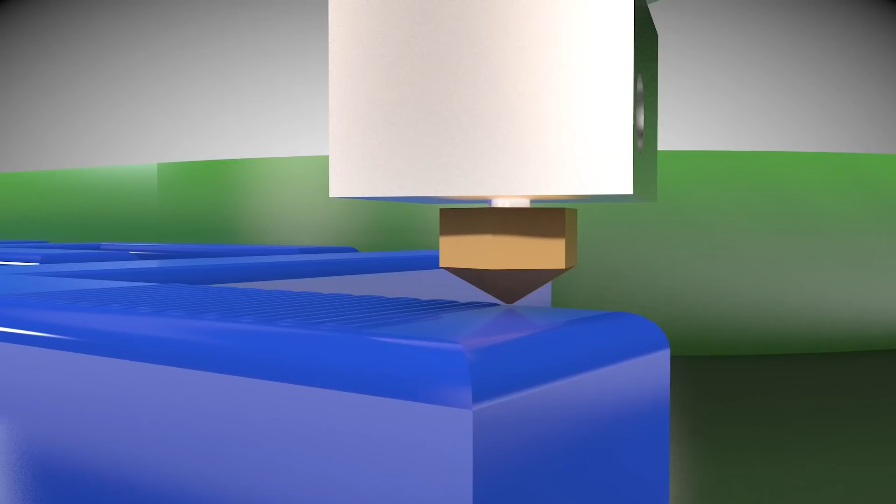Like I was saying in the introduction, during the 365 project in December, we printed out this really cool Droop Loop Christmas tree. If you're unfamiliar with this process, basically it takes a 3D printing failure to create this really cool fuzzy tree look. Normally in 3D printing, you want your plastic to meet another part of the model and continue on. In this instance, the little droop loops come out, stop, and come back, and do not connect to anything, and then they cool off and sag down, hence creating this really cool droop loop look.

This is a really cool model by Thingiverse user BQ3D, and I'll put that link down in the description. This year I wanted to do something different. I'm a little bit more confident in my settings in Simplify 3D, and of course my gMax 1.5 XT Plus loves to print big things, so I thought it was time to gMax size it. So for this year we have the gMax size Super Duper Droop Loop Christmas Tree.

This turned out awesome, and I printed out all the accessories that come with this model. Again, that link will be down in the description. It took a little time in Simplify 3D to get this to work properly, because when you scale something up like this with single loops coming out, you're going to get multiple layers of loops for the rest of the tree. I had to figure out how to master that to still create the look and not have this big bristly hard tree just sticking out everywhere.

For the print, we used AMZ 3D Filament. I used 3 different colors, obviously: some of their green for the base of the tree, some of their translucent yellow for the star on top, and some of their translucent blue to create all the ornaments. These were perfect for our tree. So let's head over to Simplify 3D, and I'll show you how I did the setup to print the tree.

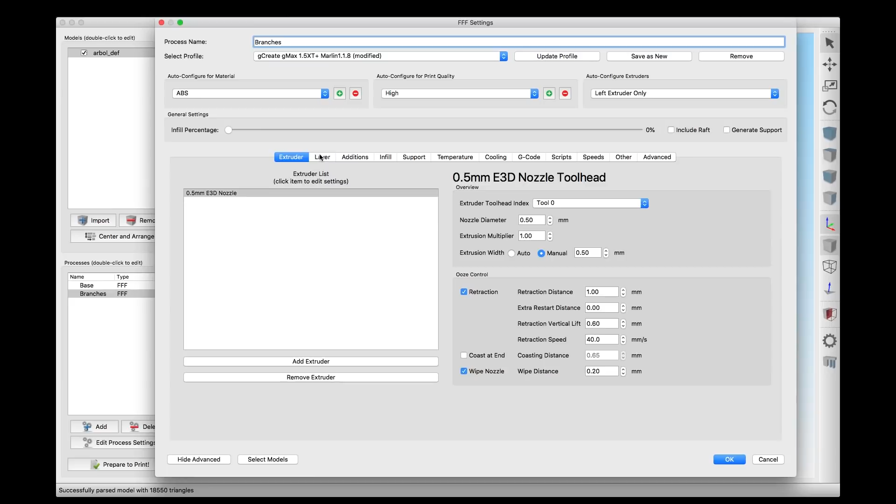For the branches setup, we have completely different settings for this, and this is very important because we really want to make sure that we only get one extrusion per layer. This took a little bit of figuring out to get it to work this way. I increased my primary layer height to 0.36, putting down the most amount of plastic I feel safe extruding out of my 0.5 millimeter nozzle on my gMax 1.5 XT Plus. I turned off the top and bottom solid layers and went down to one perimeter.

We've changed our variables here because we don't want to make any adjustments on that first layer. After the process change, it's 100% and optimize start points. We've turned off our skirt brim. We have 0% infill because we don't want to fill in these branches - we want them to be loops, no support material. And again, here are my temperature settings.

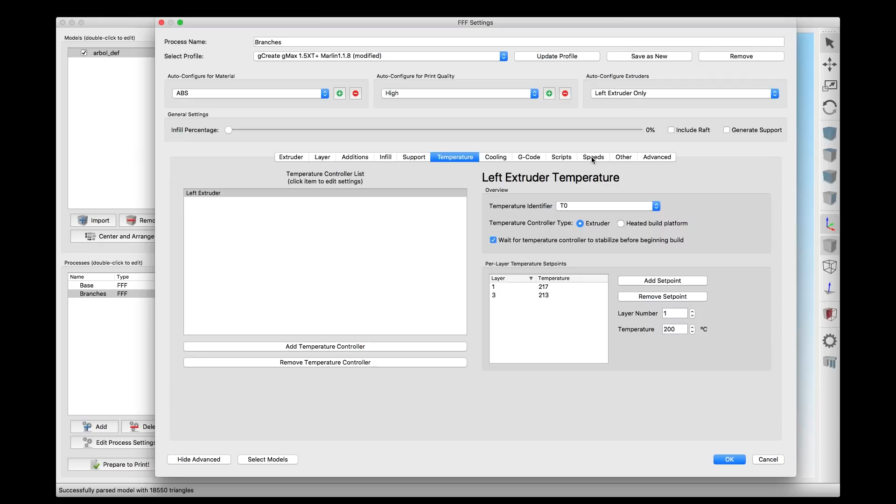If we go over to cooling, this is where I should have made an adjustment, but I didn't next time. Under speeds, we're going down to 40 millimeters per second with the same variables. Under the advanced setting, we are allowing single extrusion fill because I want to make sure that we override any kind of infill that might print, even though we have this set for 0. Sometimes Simplify 3D will add in support areas around infill, so I have this set up - this was the way it worked the best for me.

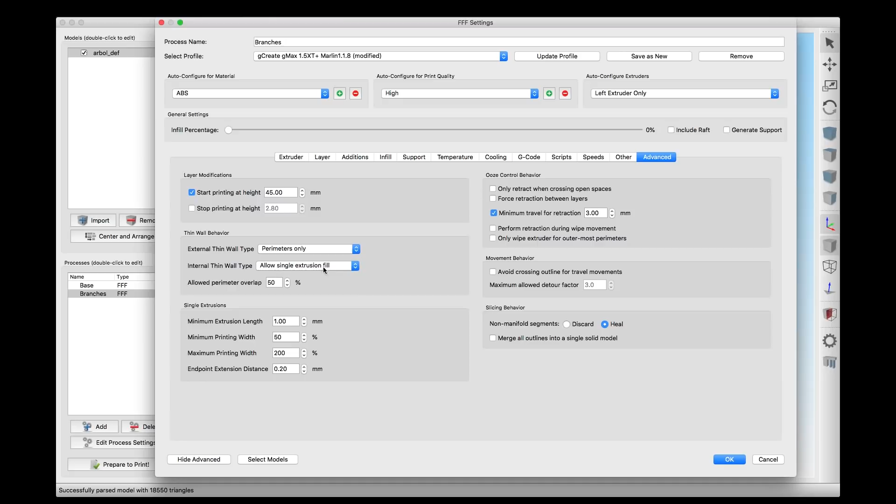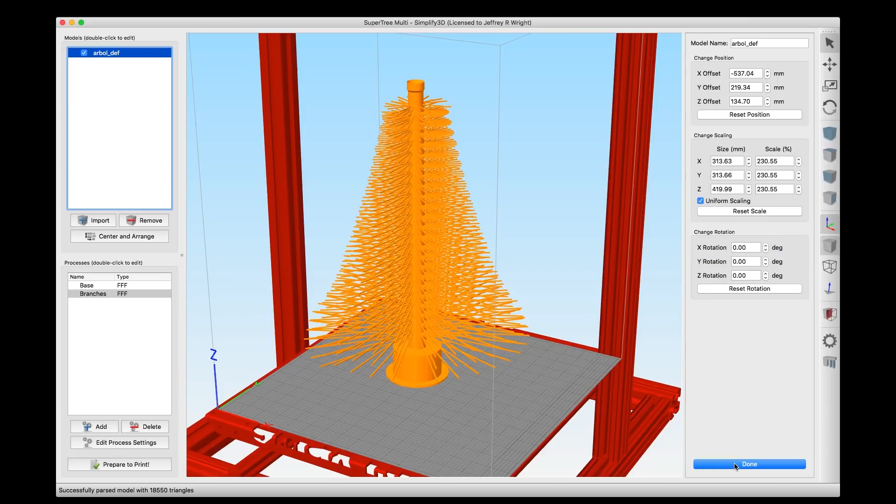So let's go ahead and hit OK, and we'll hit Prepare to Print. Before I do that, let me double click on the model and show you the scale. We're at 230.55%, 419.99, which is this 420 millimeters - the safest distance I go on my gMax 1.5 XT Plus, because I do have a filament runout sensor at the top, and I also don't want the print head to run into the filament roll when it gets really high. So 420 millimeters is my max build volume for my gMax.

So if I hit Prepare to Print, we do Select All, and we hit OK, this will process through and do our slice. Now I'll show you the differences between slicing it with regular settings and the settings that I figured out, but I want to show you this first.

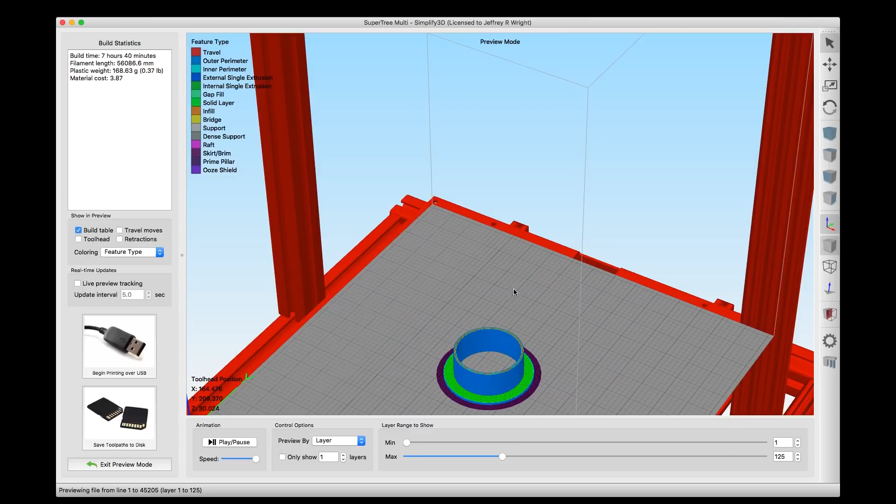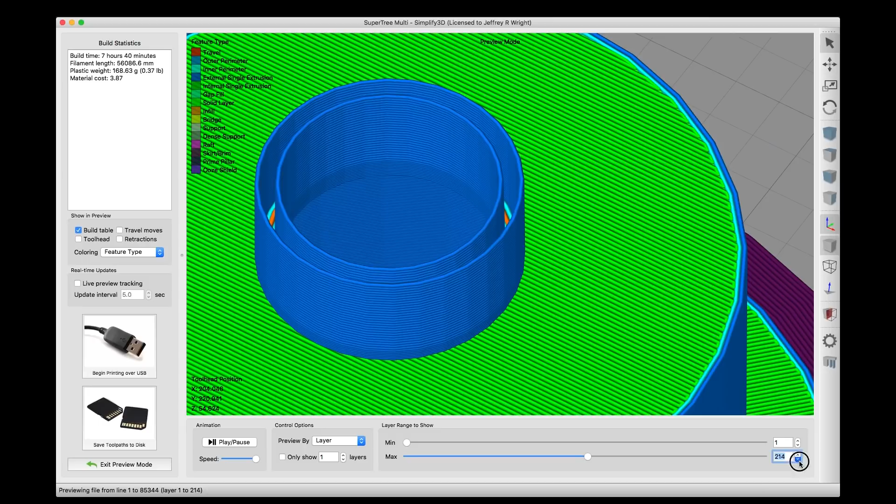So if we dial back down here and we zoom in, you can see there's the infill printing for our first process. When it gets up to the top, it starts printing out the shaft. As you can see, it's going to print out single layers. Now it's going to show you that there's multiple layers, but what's happening is these are on a per layer basis. So if I go down to the very first layer, you can see that we've achieved the process - it actually removes itself from the center or the outside perimeter and creates our loop and comes back. So this will give us a perfect join.

And if we go up to the next layer, this is already drooped down. That first layer that printed is already drooped down, and we're starting to do our second layer on top of that. This will droop down in a different direction because the laws of chaos.

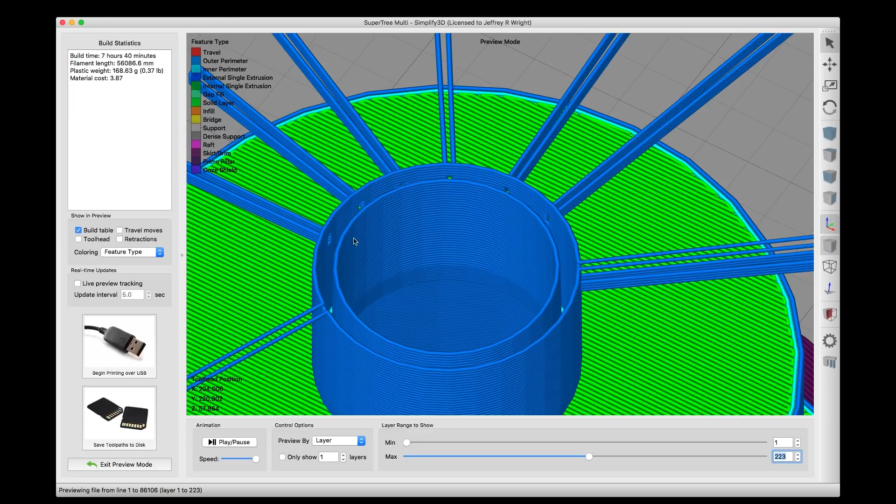If we go through here, you can see that it skips a few layers, and then it starts printing again. Now this will give it plenty of time to cool off and droop down, plus printing out this center perimeter will also give it a little bit of cool down time.

Now, if you look, you can see, if I go to the top view here, you can see that this is probably as far as you want to go, especially on my gMax 1.5 XT Plus with these long branches.

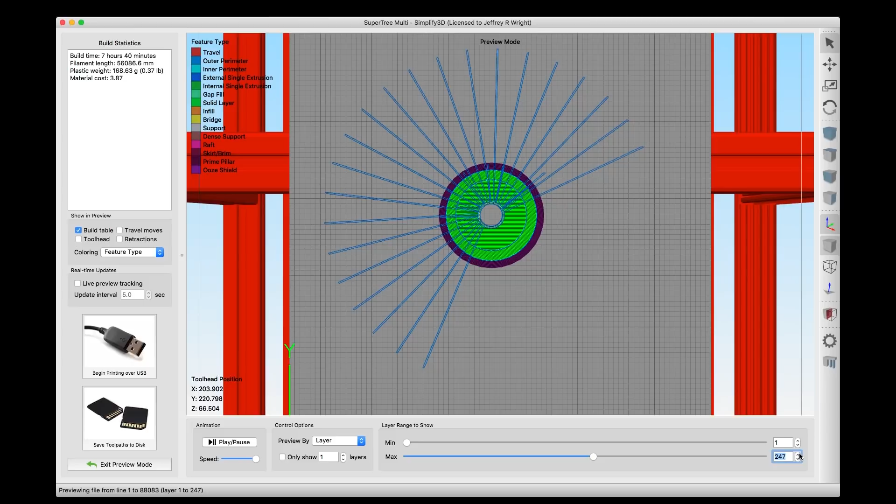So back over here in Simplify 3D, let's exit out of here, and I'm going to save this just to make sure. And let me show you what a standard looks like.

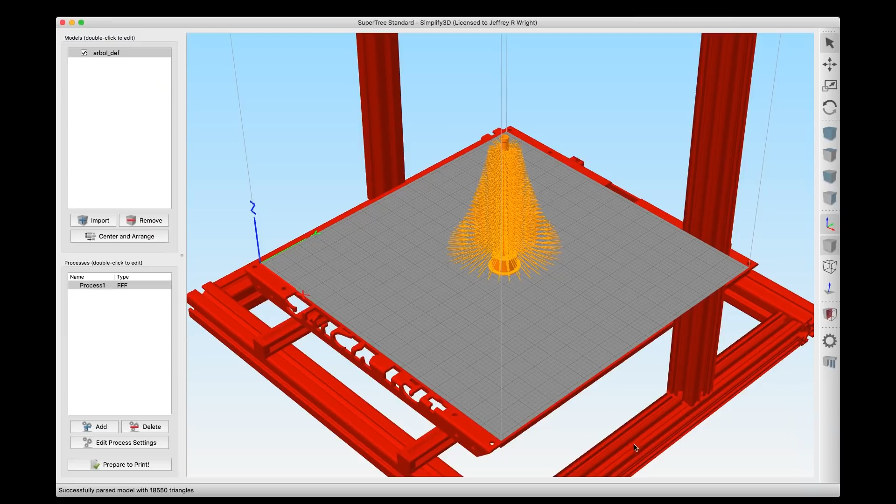So here's the tree at 100% with a standard process setup. This is my standard printing setting for my gMax setting, and as you can see, we have a 0.36 millimeter layer height. If I slice this and I show you, we're getting single branches coming out.

So when you scale it, you're automatically going to increase the size of these single branches coming out, and you're increasing the width of them coming out. So that's why I addressed it with a separate setting.

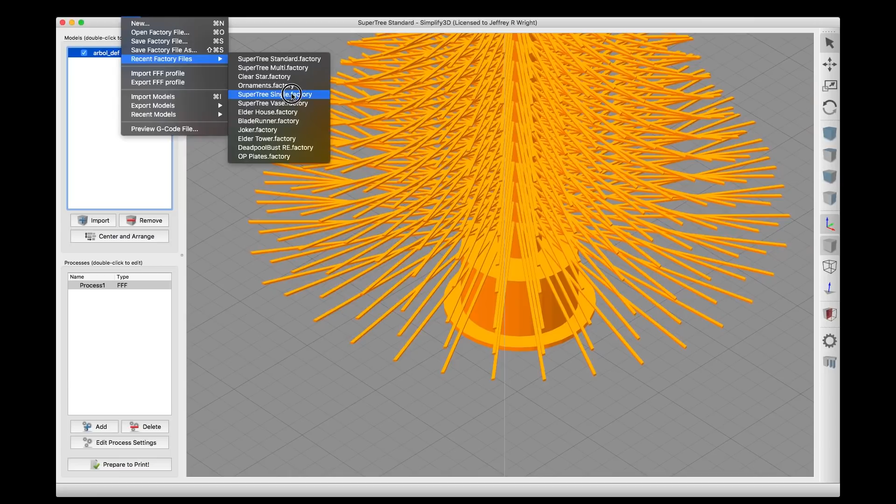Now I also have a model here in the Super Tree Single. Okay, so this model that I sliced was to show you if I didn't do any of those settings. So let's hit Prepare to Print.

And let's dial it down. Already you can see, if you go by the color, you have your gap fill and you have your inner perimeters, and you're getting a lot of that. Now this would create probably a stiff bristle tree instead of a Droop Loop tree.

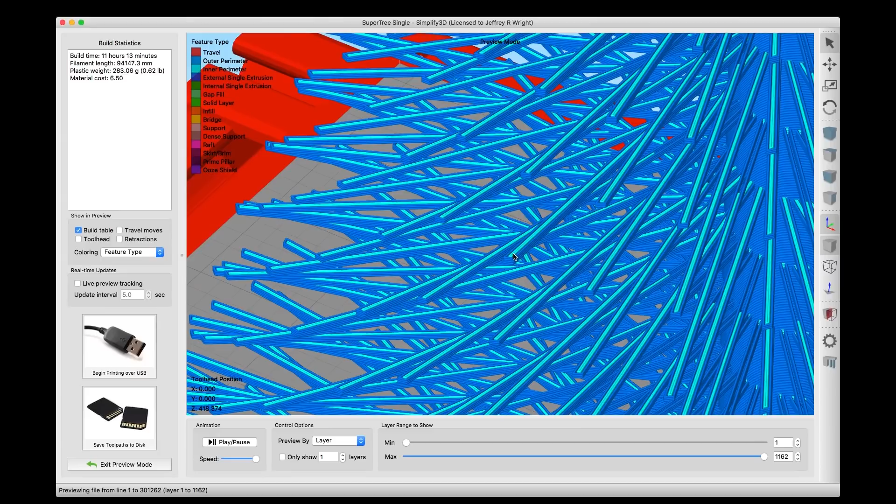So I knew I had to make some adjustments to my settings. So if we exit out of here and we go back into our old settings, and here's the settings I did for the star, and of course I did scale this up to the same amount, 230.55%. And as you can see, there is some built-in support material.

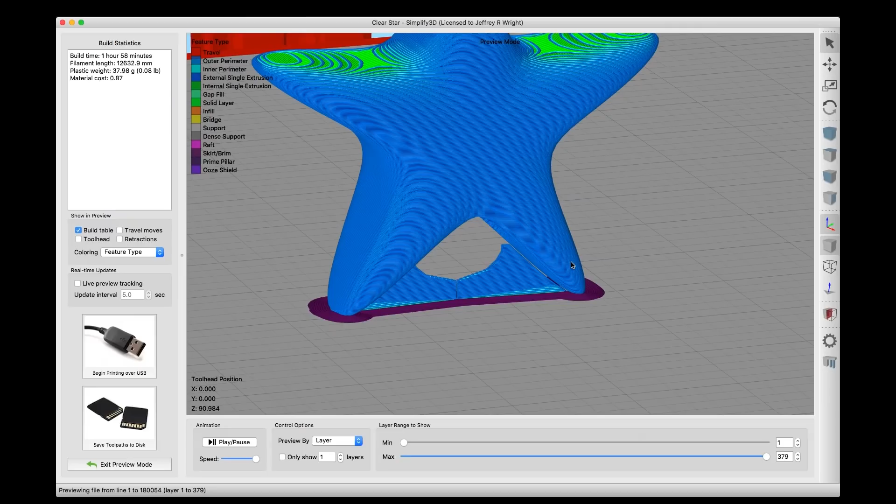And if I hit prepare to print, you can see I put down a brim just to make sure. And of course, I did lower this into the print bed just a little bit because I noticed that the star tips weren't quite touching.

So if we zoom out of here, let's go over and look at the ornament setup. And here's how I have the ornament. Now they come in one tray.

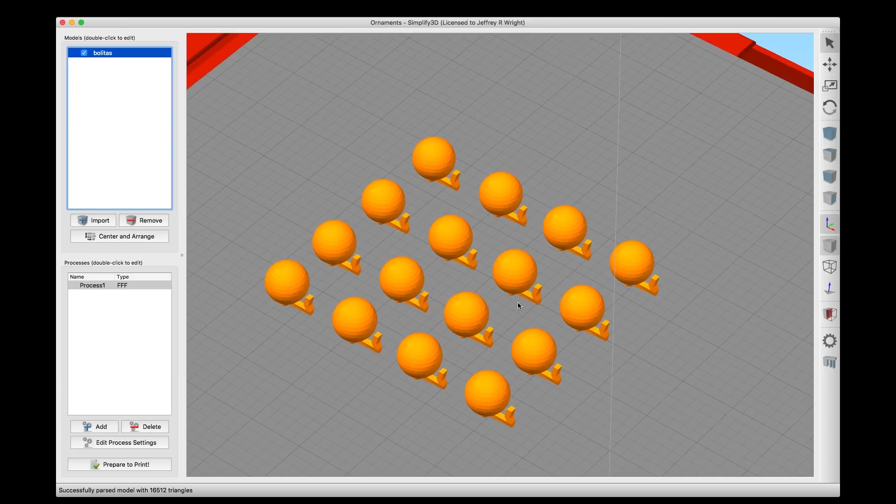If you have a multiple or multicolor or multi-extruder machine, you could probably print these out in 2 different colors, but you'd really have a big purge block.

But for this print, I just did some basic settings. Again, 20% infill. For this, we did a 0.16 millimeter layer height because they are spheres, so I want them to be as round as possible, so the smaller the layer height, the better.

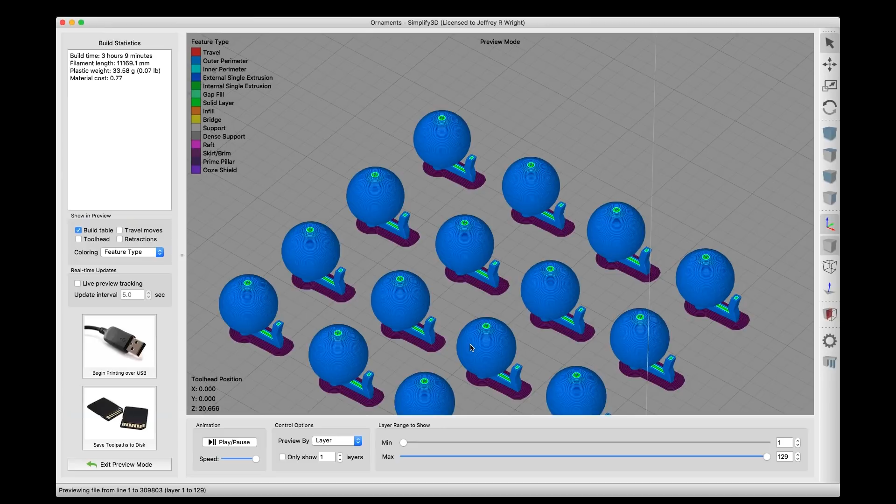And as you can see during the slice, there's a brim around each one of these just to make sure they all stay attached to the print bed. And I'll dial it through, and you can see you get a more perfect sphere with the lower layer height. So everything printed out really, really great, and I'm really happy with the results of all the prints.

So let's head back over to the workbench, and we'll talk a little bit about our gMax sized Droop Loop Christmas tree. So now that we have all of our files set up in Simplify 3D, it was time to load the gMax up with some of the filament that we were going to use. And of course, we were going to start with the green so we could print out our tree.

Now, if you follow me on social media, I was posting pictures of the progress of the printing, which is really cool to see because literally it's almost scary to watch this print because it literally brings the filament out almost the full distance of the build plate and then stops and comes back again, creating our Droop Loop.

Now, I probably could have, when I scaled this up, lowered the base down into the print bed a little bit and added a really thick brim or skirt around the edge there to hold it down.

If I had lowered the loops a little closer to the print bed, it would have created a bushier tree, but I was happy with the way the print was going, so I let it finish. This was a longer print since we scaled it up to 419.99 millimeters. I actually plugged in 420 millimeters, the safe height of my gMax printer, but Simplify 3D rounded it off, which is fine with me. The tree itself printed out fine, but I knew I still had to finish it.

The next thing we printed at that same scale was our cool little star. For this we used some of AMZ 3D's translucent yellow filament, and it turned out awesome. It has a little piece of built-in support material on the bottom because it prints standing up. I noticed in Simplify 3D that the tips of the star weren't quite contacting the print bed perfectly, so I lowered it down a bit to get more contact, even though there was support material that would attach to it. I also attached a brim around the edge to make sure it stuck to the print bed for the length of the print.